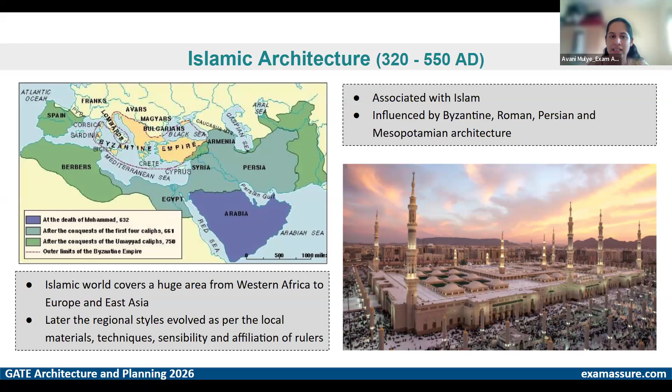Of course, when you are such a big empire and you are not just conquering and staying there on a temporary basis, but now this is your home, then you have a wide variety of buildings.

So when we even look at Roman architecture, you will see that the kind of society or the kind of lifestyle that people have shapes the kind of structures that you will see.

So when the societies were not democratic, there was no need of something like a parliament or something like that. But when you see that the societies will start democratizing, then there will be something like a House of Commons and everything. Right now what you see is House of Commons and House of Lords, or what we call Diwan-e-Aam and Diwan-e-Khas.

So that is a part of the king's campus or the kind of premises from where he or she is leading.

But then when later on we see democracy coming into societies, you will see that these were separate houses. We have Lok Sabha, Rajya Sabha, or an entire building which is dedicated to political discussions and all of that. So then you will see a shift in the kind of structures which are required within the society.

So currently you will see very basic structures, which is a house to live, a place to worship, and a kind of fort, because you're constantly defending your empire from external powers.

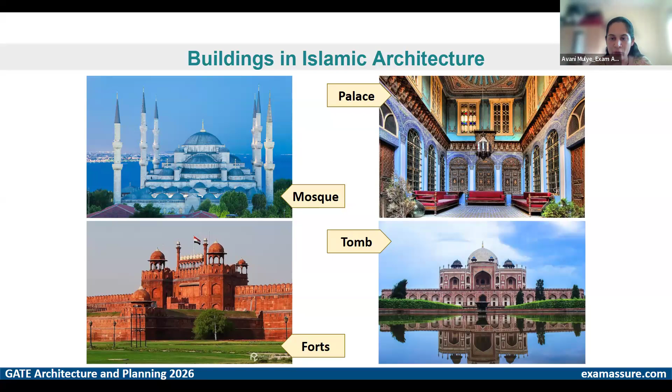And then of course forts, because you're constantly having some sort of war or battle or conflict, so you need some layer of protection as well. And then within these buildings you will see elements which are very Islamic and elements which are taken from some local culture and incorporated or blended in very well.

So one of the elements that you will very commonly see is arabesque. Sculpting, and sculpting in marble, was a very common thing, and arabesque is an infinite kind of pattern with flowers and creepers and leaves and smaller insects and all of that. It's a very natural sort of infinite pattern. It symbolizes unity and power, something that doesn't have an end and a start, so that in all of it looks like a whole. There's no parts coming in together, but it's all a whole. So arabesques represented unity and power and were a very common sight in Islamic architecture.

Then you must have also seen motifs. Motifs are your stucco with colored gems or colored stones being put together in a geometric pattern to form an artistic element, right? So motifs was that. Then Islamic calligraphy.

If you look at any religion and the religious structures that follow, you will see that there was some way of communicating to the common people what the point or the ideology is trying to tell you. If you visit temples, you must have seen that there are always either wall paintings, or some sort of prayers written somewhere. Similarly, in Islamic architecture also, Islamic calligraphy was not just an artistic element, but also a way to communicate what the prophecy or the ideology is trying to tell you - what is good and bad, how should you live your life.

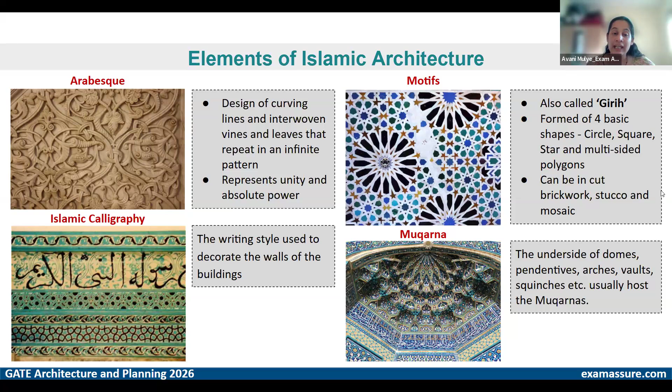Then it also - so these were artistic elements, but there were also structural elements that will help you identify that, oh, this is an Islamic architectural example. So symmetry being one. If you go to Humayun's Tomb also, there is a vertical symmetry and there is a horizontal symmetry.

The most popular picture everybody tries to click of Humayun's Tomb is with the water fountain, where people try to make an exact mirror image horizontally as well as vertically, taking the full reflection of Humayun's Tomb in the water. That's the most popular shot you'll see of Humayun's Tomb. So symmetry, be it horizontal or vertical, was very important.

Also, the dome size varied. When you talk about temples, they also have a bigger tower over the place of importance. Similarly here, if you have multiple domes, the bigger dome will be on the Qibla wall, the wall denoting the direction of Makkah, and there can be multiple other domes smaller than this major dome.

But apart from domes and arches, a series arcade, which is a series of arches, is also a very important part. Minarets too have variety across the globe wherever Islamic architecture exists. There is the Ottoman minaret, which is very pointy with a small diameter at the base, and then the Taj Mahal style Chhatri minarets, which have a Rajputana Chhatri on top.

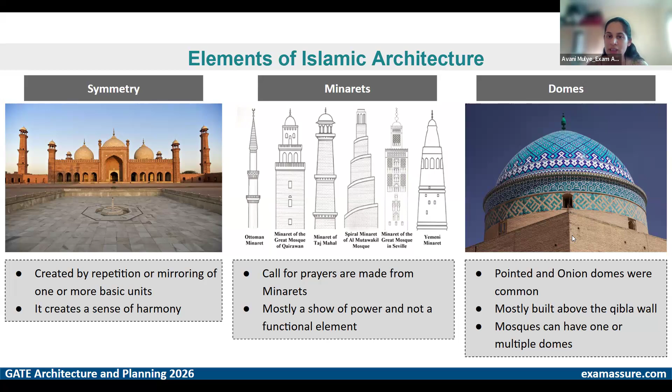So you have pointed domes, onion domes, ogee domes. All of this variety comes from the kind of arches that were developed, and even these domes were decorated from inside and outside. So these are a few structural elements that will signify and show you exactly which Islamic structure this is from.

Then there are also some spatial elements that come into picture, one of which is the Iwan. This is like an entrance foyer sort of space. You will always have a very high plinth, and an open platform, and before you transition from this outer space into an inner space, you will have a transition space, which is called Iwan.

This is an arched doorway or gateway that takes you inside the structure, so that is your connection between the outside and inside world, but extremely decorated. You'll see calligraphy, smaller arches within one bigger arch, and a lot of geometric patterns decorating the side walls of the gateway. So that is the Iwan for you, which is like an entrance foyer.

Then you have the hypostyle hall, which was extremely common in most religious structures, regardless of religion. It has a bigger central hall as the centerpiece, with everything set up around it - multiple columns lining a big hall, with corridors on both sides. If you go to a temple, it's a similar arrangement, and Egyptian temples also had a similar arrangement.

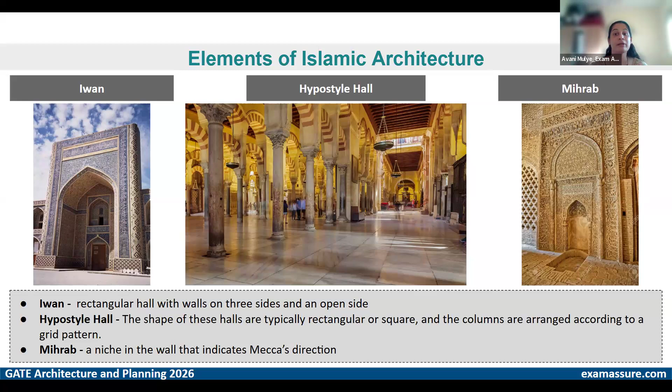Right. Apart from that, you have courtyards and gardens, which are extremely popular. Courtyard was also a very big feature, so if you have gone to Jami Masjid or anywhere, a big courtyard with a water tank or a small fountain is very important. They also follow a ritual where they clean up before they enter the space. So they have ablution tanks accordingly.

Gardens also form a very important place in Islamic architecture. You must have seen it in Humayun's tomb also, or Char Bagh basically, where you divide the plot, or you divide the garden into four quadrants, and then further divide each quadrant into multiple squares. It is a 9 square arrangement basically.

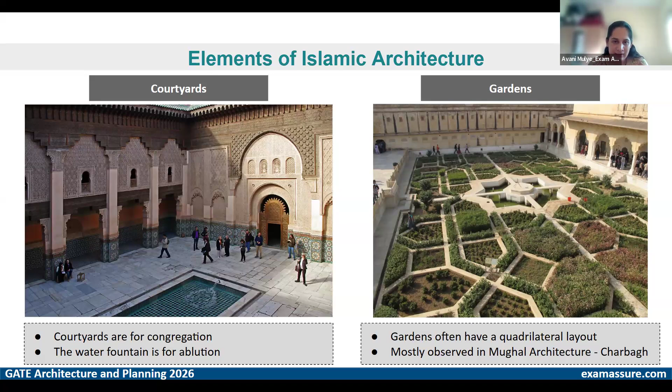And then every quadrant has its own theme, and there is a continuous channel of water that flows through this entire garden. So this is the kind of design that their scriptures say existed in heaven, and that is why they try to replicate it on the ground in their homes or in their religious places, so that they can invite the divine in. So that also forms a very important part of their architecture.

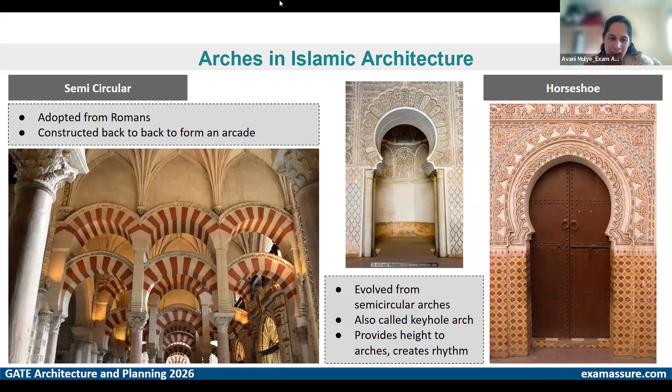Okay, are we okay up till now? Have you followed the basics of what Islamic architecture is all about? I will need this. I keep needing this reassurance time and again. Even if this is a demo lecture, you can definitely say, is it working or not working? Or if there's something specific that I've missed up till now.

Oh, काफी सारा silence. Okay, cool. I think I will finish the part and then let you think if it worked for you.

Okay, so apart from that, like I said, they borrowed arches from Roman architecture, but they didn't sit still with it, right? Roman architects were majorly building semicircular arches, which are the basic kinds of arches. But when Islamic architecture took it, they experimented a lot with the kind of arches which worked in their favor, or the kind of things that they were structurally expecting. So, the semicircular arch was first modified into a horseshoe arch.

A semicircular arch is very simple, right? If you just look at the design here, this is a semicircular arch. This is the beginning of my semicircle. This is the extra height that I get if I don't make a rectangular opening. So this is the only extra height that I achieve. But if I want to achieve bigger height, then I have to either increase my span, or make wider columns so that a bigger diameter can be supported, something like that.

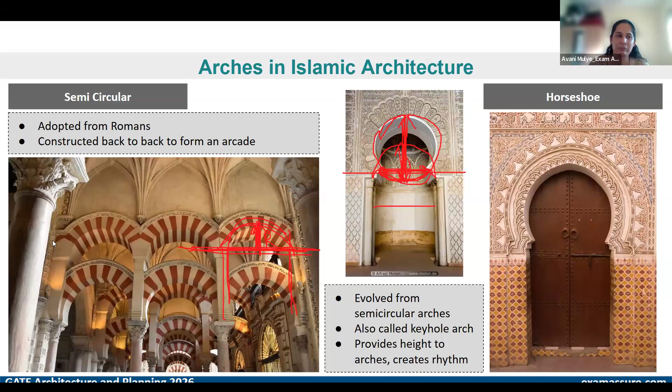Then again, when you have arches or a series of arches, you generally use them to cover or line a corridor. Now, if you want to cover a corridor through arches, either you have very heavy columns that are supporting the load of the entire corridor and the structure above it, or you have a continuous wall and you can't have multiple arches, or you have fewer arches, because too much puncture can compromise the structural stability.

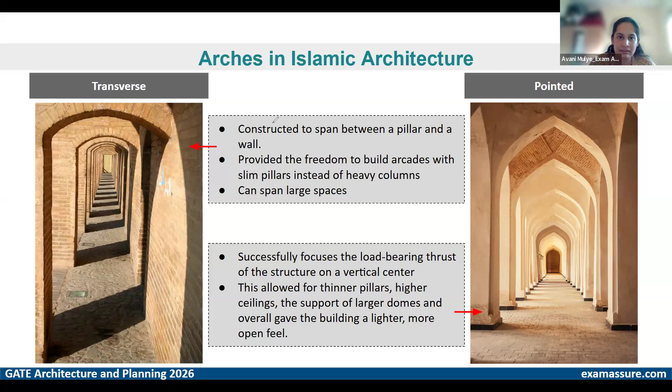To counter that, they made another modification to the semicircular arch, which is called a transverse arch, which has a continuous wall running on one side of your corridor, and then there is a series of columns supporting arches along the corridor. So if this is your corridor, the arches are here, right? So there are arches in series. You see something like this, and then the corridor runs this way, right? But here, what they did is that the arch ran like this.

So you have a wall supporting the arch on this side, which is a continuous wall, and then there are columns supporting here, right? Now these columns don't have to be very wide because on one side the arches have proper running support. So you don't have to bulk up these columns, and you can have more span in between the columns, which gives your building a lighter and more open look, right? And it forms a very interesting pattern in the corridor as well.

Here, you will see that they were not going for too much height as compared to what they were trying to do in the horseshoe arch, but they were looking for a lighter structural feature, right? So here you will see a slight turn outwards. Instead of going in with the arch, they went slightly outwards. And a very subdued sort of an arch, which is not really semicircular. It is more like a part of a segment. So it's a very shallow arch.

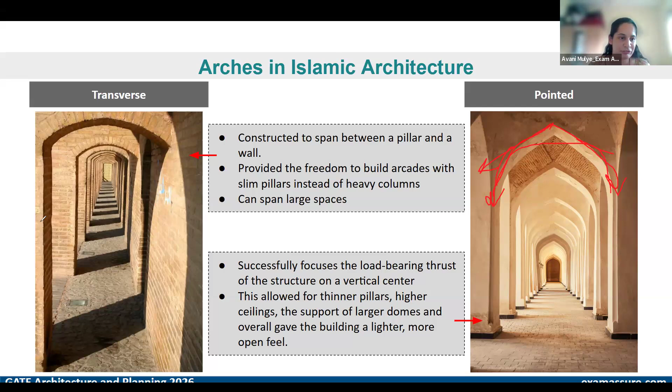Now, if you remember the vector forces taught in 11th and 12th physics, you will realize that the semicircular arch is pushing the entire load that comes on it through the columns into the ground, right? Here, because instead of going like this you slightly turn it up, you have division of load into the side columns and vertically down into the walls as well, which helps this remain pressed against each other and forms a pointed arch, which allows more height, more span, a lighter kind of structural response, right? So these are the kinds of changes they brought into the basic semicircular arch to fit their requirements.

Another arch kind is the ogee arch, which has a slight bend before it joins at the center. It is a modification of the pointed arch, where there is a slight S-shape. There's a slight bend before it joins on the top. Because of its S kind of shape, it's called an ogee arch.

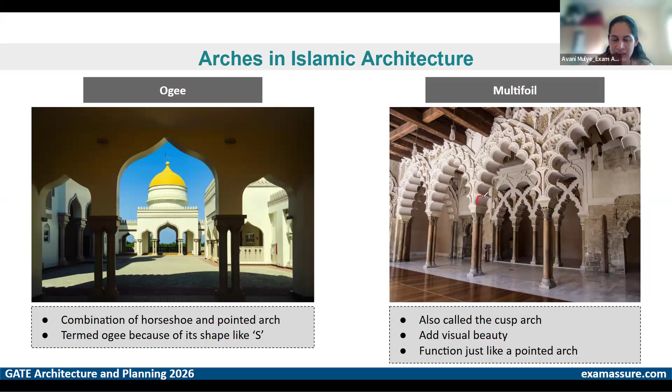Then you have one aesthetic idea of an arch, which is called the multifoil arch. Here there is no structural requirement they're looking for; they're focusing on the arch as an aesthetic element. So you have more cusps. This here is called a cusp, C-U-S-P. These are multiple cusps on the internal part of the arch, because of which it is called a multifoil arch.

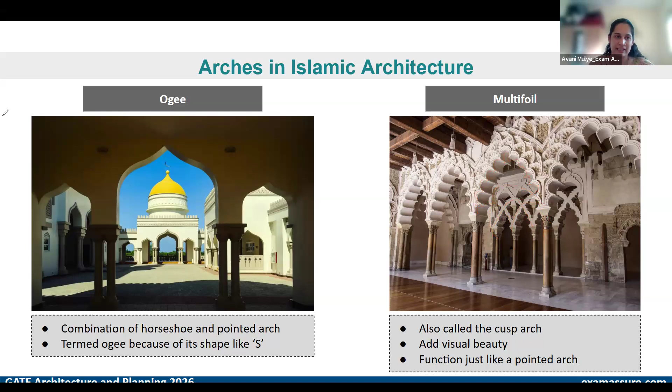These can be intersecting, so you will see that here they are intersecting arches, right? This is all for aesthetics. They had no structural purpose in mind with this. But yes, they played around with arches quite a lot in Islamic architecture and made very interesting structures as well. Coming to a few examples before I close the demo.

Here, the Dome of the Rock, which is the oldest existing example of Islamic architecture, has an octagonal base. It has a central, bigger circular dome, which was made of wood earlier, but after it was burned down, it was changed. You have 8 columns in the front. You have an octagon as the base. You have calligraphy done on the walls. You have multiple arches. You have a bigger central dome, signifying the place of the rock.

So Dome of the Rock means dome ke niche. Below there is a gallery through which you go down to a basement where a significant or sacred rock is kept. And the dome signifies the place where the rock is kept. Hence, Dome of the Rock is the name. So this is one example.

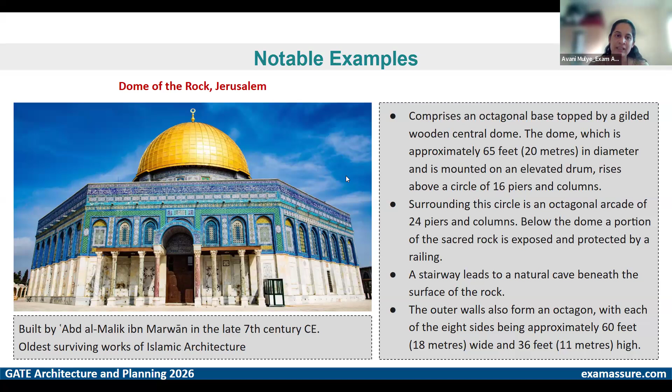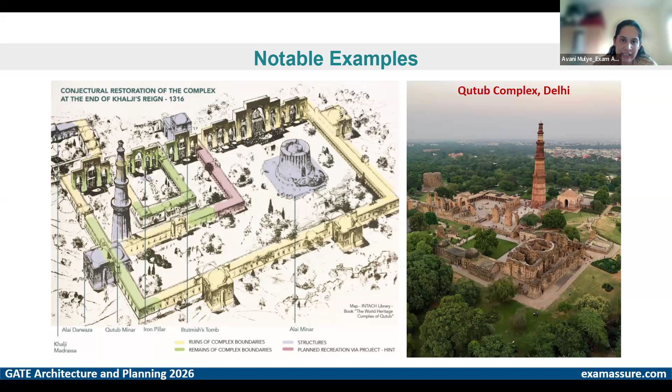There's Iltutmish's tomb, which was made by his family for him. There's a madrasa. There's Khilji's tomb. Then there's the iron pillar in the complex, which was brought from the Raja of Udaygiri. So there are multiple structures here, and this bigger arcade that you see on one side of the complex was also not built in one go. It was a very evolving process. It was built in portions.

When you look at the Quwwatul Islam Mosque, the roof is supported by columns which were brought from the remains of 27 different temples. So when you look at the photographs, the columns are not typically Islamic. There are a lot of features in Qutub Minar also. With every story, the diameter keeps reducing, and at the base of every story, you will see a kind of balcony, the chajja or eaves, that make the story very interestingly carved. It is a brick tower, one of a kind for that tall a tower made only with bricks.

Alai Minar was conceptualized to beat Qutub Minar, and hence, if you look at the picture on the right, which shows the aerial view of Qutub Complex, you can see that it was a way bigger project than Qutub Minar.

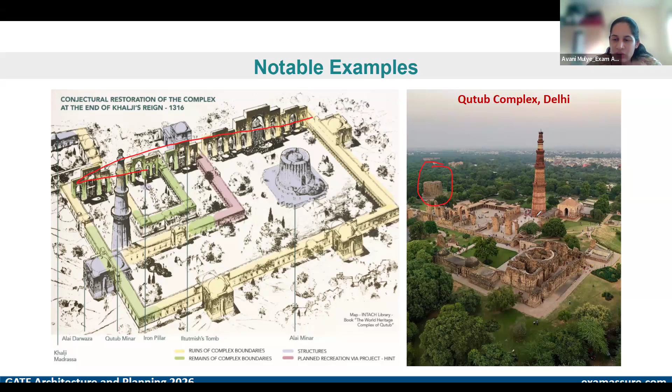So imagine if it reached its completion, what was the plan when they started making it, right? So these are various structures which are a part of Qutub complex. Then, of course, we have Alai Darwaza, the first building in India to use Islamic architectural principles.

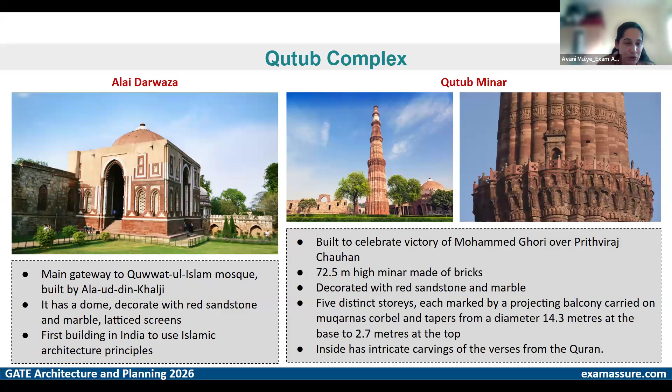So you have lattice jali, sandstone, marble cladding, and a horseshoe arch, which has a very interesting feature. You have these conjuras or kangura. On the intrados, the inside of the arch, there are spikes, which is a very important feature. These spikes were later also used to crush animal heads while they were trying to enter a specific structure. Then you see Islamic calligraphy on the Qutub Minar also.

If you look at Qutub Minar, it's not a smooth circle as a base. It's a multi-cusp base, right? So the base of Qutub Minar is something like this, it has multiple cusps. And if you similarly look at Burj Khalifa's base, it is very similar. Burj Khalifa's base has a three-petal sort of arrangement, an intersecting petal arrangement base.

Because you can't support a circle that well. A proper full circle is not a good idea when it comes to stability. So a multi-cusp base, right? It was of course celebrating Muhammad Ghori's victory over Prithviraj Chauhan, and the establishment of Islamic rule in India as well. It is made of sandstone and marble. That marble has now washed off quite a lot because of the time that has passed. In this picture, you can see a little marble left on the top stories, but from the lower stories, it has mostly washed off.

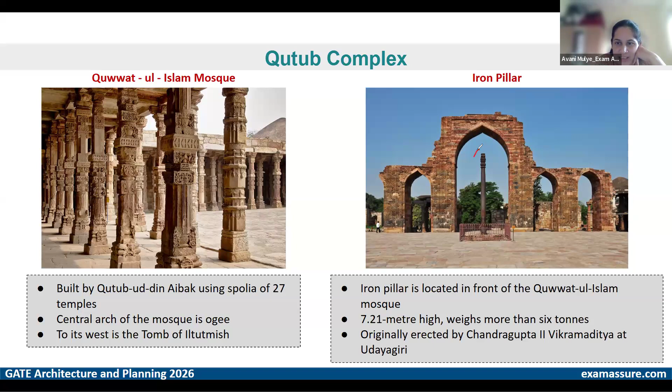So when we discuss everything in order, you will notice that अशोक ने बनाए हुए जो धर्म स्तंभ थे, or even the Sarnath pillar from which our emblem is taken, all of these have animal capitals. Animal capitals began in Persian architecture and Greek architecture, and then it carried forward because these were also places where Ashok went and gave the message of Buddhism, right? So wherever he went, to mark that I have been here, he made a dharmastamba. And this Udaygiri place was also one of his routes.

And hence, this particular pillar, we tell you that it was not an Islamic feature. It was brought from somewhere and placed here, because again, it was a souvenir sort of a thing that they got from some conquest, right? So it was from the time of Chandragupta Vikramaditya, and it was brought from Udaygiri to this particular complex.

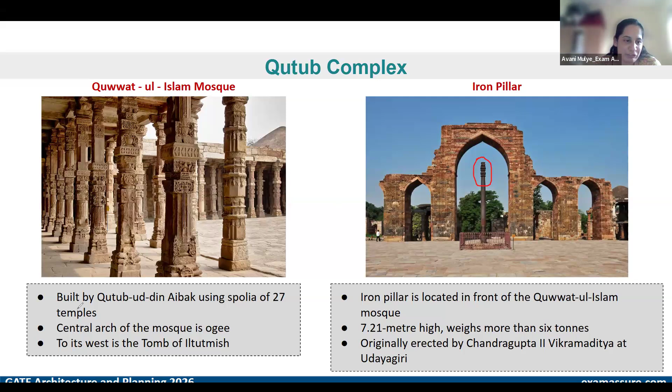Then, like I said, there are other structures here. There is Iltutmish's tomb. There's Alai Minar. There's Khilji's tomb. There's the tomb of Muhammad Ali, who was one of the people of importance in the court of rulers. So his tomb is also there.

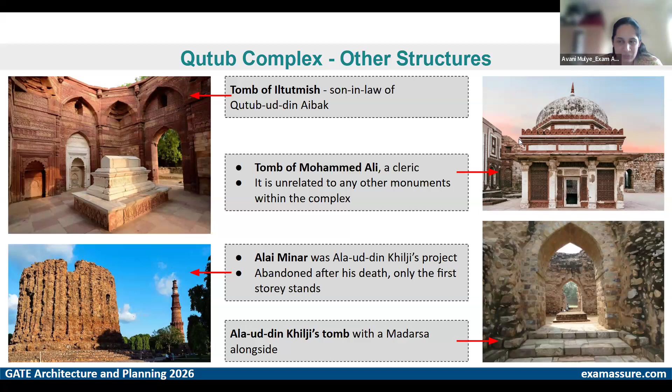So yes, this is majorly, and then a very big part of Indian history or Islamic architectural history, Mughal architecture forms a very important base of that. Mughal rule was established by Babur in 1526. Very quickly after his death it was taken over by Humayun. Humayun laid the foundation of the Mughal empire in the country.

Akbar contributed much more because he received a stable sort of empire to rule over, because his father had worked and fought and expanded the boundaries for the 26 years that he ruled. So Akbar, when he sat on the throne, had the slight privilege of not being constantly at war because he had a stable empire to himself. And because he ruled for almost 50 years, he had a lot of time to contribute, to understand, to spend on architecture and art and music and poetry and everything else.

He was succeeded by Jahangir, who was more into gardens and nature. So Jahangir contributed more in Charbagh and various gardens. When we talk about Jammu and Kashmir and the beautiful gardens there, which have those water channels flowing and finally mix into a bigger lake, Jahangir contributed in that zone quite a lot. Shah Jahan, of course, we know him for Taj Mahal.

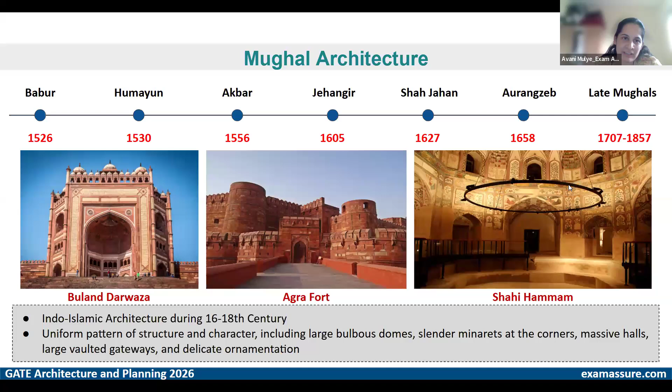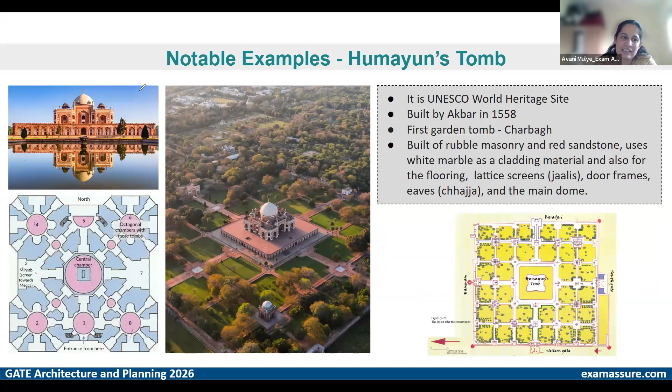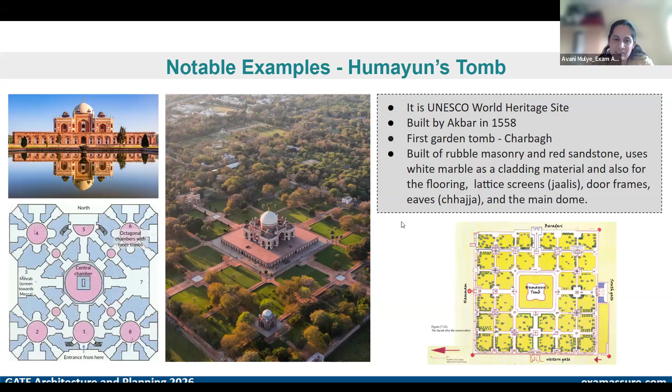Humayun's tomb, of course, will be discussed in detail because this is one of the prime examples of Mughal architecture. And like I had said, the central chamber is octagon. If you look at the base, because they've chamfered at the corners, it is octagon. It's the first garden tomb in the country. Like I said, this picture in the left top is the most sought after picture for any new and experienced photographers. Also, it's a UNESCO World Heritage Site. And yes, it's a very typical example of Mughal architecture in the country.

Then Taj Mahal, of course, will be discussed. I try and add a few videos in the lecture so that apart from me just going on and on about whatever I know, there is some insight or some sort of break from just me talking for a very long time. So I try and add some interesting videos. This is not my personal content, of course. I've sourced it from YouTube, but I just try to curate something so that you don't have to go look for the right kind of videos.

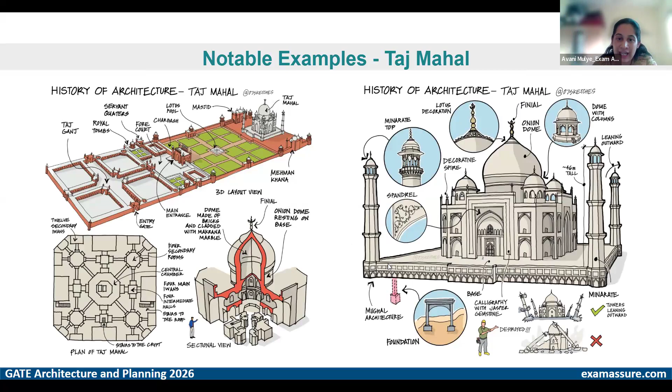So yes, Taj Mahal is being discussed through sketches and video as to what was the genius of Taj Mahal. Yes, it's a full marble thing, but it has a lot of secrets in the kind of structure it is. Because it is in the floodplain and very close to the river Yamuna, the kind of foundation that they thought about, how flooding can be mitigated and managed, and the mausoleum should stand its ground even if there is water or liquefaction or whatever. All of that was thought of very intricately, and we'll try and discuss as much as we can in the lecture. This slide talks about the various spatial, structural, artistic elements of the entire structure and a little bit about the foundation also. The detailed pictures, of course.

And then there are other examples, like I said, there's Bibi Ka Maqbara, there's Gol Gumbaz in Bijapur. It is very special because here the minars are stuck to the central chamber, not away from it, and they have eaves or chajjas at every story. So every floor, every story. So yes, that's what makes it interesting.

Then there's Panch Mahal, the entire Fatehpur Sikri: the Diwan-i-Khas, Diwan-i-Am, Panch Mahal, Jodhabai Ka Mahal, that entire complex. Then there's Buland Darwaza, and in its complex the masjid, the Salim Chishti ki dargah, all of that. The gardens in Jammu Kashmir. There are also neighboring countries where Mughals were very active and powerful, so you see examples like Badshahi Mosque, Lal Bagh Fort in Dhaka. They look very Mughal and Islamic, but they had cultural influences also, right?

And post all of this theory, we discuss a little bit about last year's GATE questions, questions around this topic from any other exams that have happened. So we discuss a few questions before we move on and see if we have anything specific that we want to cover. So yes, this is how the lecture is going to pan out when the actual course begins.

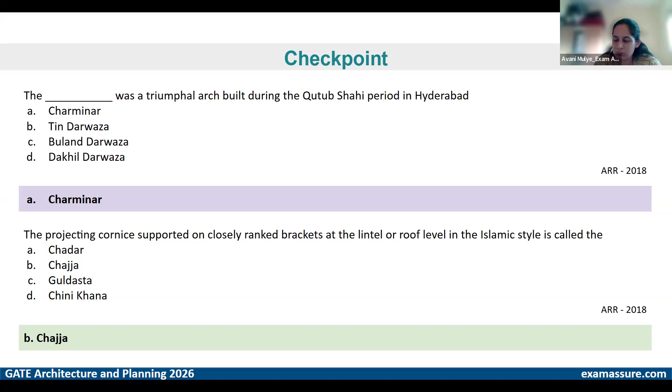Of course, Islamic architecture comes much later in the lecture series. This is, I think, the fourth or fifth lecture. Before that, we cover a lot of ground in terms of architecture when we were nomads or cave people, then forming into a society, then evolving into organized societies. Then we enter into civilizations and slowly we move ahead. So this comes much later as lecture 4 or 5. But yes, this is how a general lecture will look for you once the course begins.